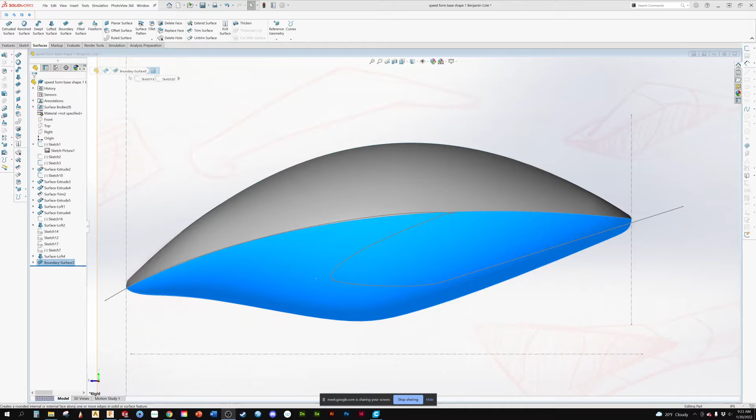So in order to trim this out using these splines, we have to make sure that, as we looked at before, if I come in and I go insert curve and I want to do a split line, that basically means I'm going to cut the surface into two pieces. I'm going to use the section. Here it is here, because it's all one sketch. Oops, we got to go to projection. It's all one sketch. And then I'll select this surface.

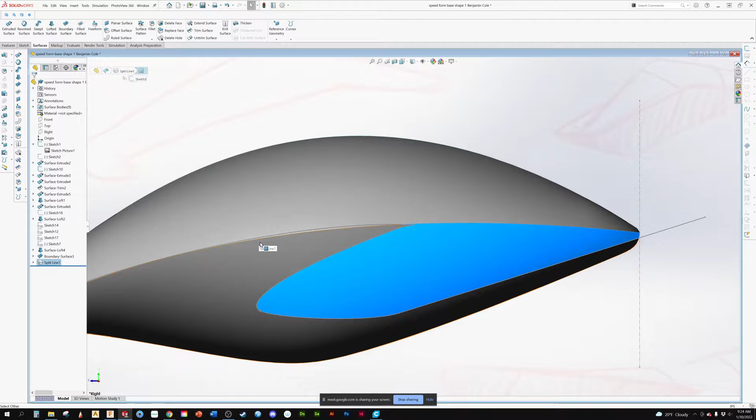Now what happens is, because we've got this extra line in there, and it comes up like this and goes around, this is the trim, the cutout that we're going to get. So what we need to do is adjust that curve so we're getting what we want. Now, what we're going to do is I'm going to come back because I want to see what your sketch looks like. So we're just going to do that.

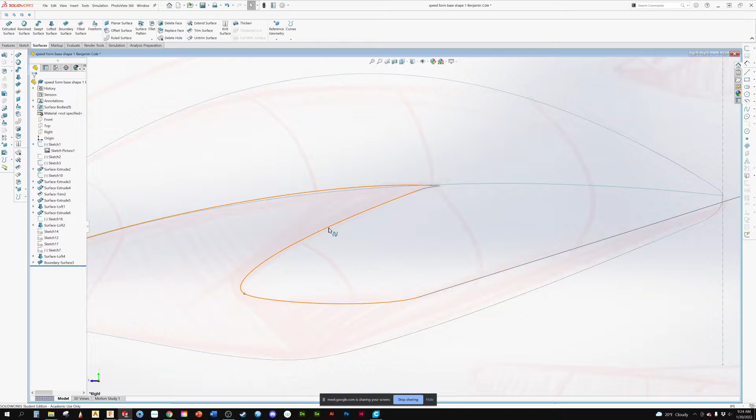And I can see that, hey, I'm not sure why you put this line in. It was an attempt to do something. But as I look at this, I want this to come up into here and blend in. So we're going to come back and we're going to edit this, and we're going to delete that. And we've got a fair number of splines here, so I would say that you would want to try to simplify this. But right off the bat, I'm going to delete this one because we just want this to go up beyond that surface. I'm also going to come in, because if I look at your mural board,

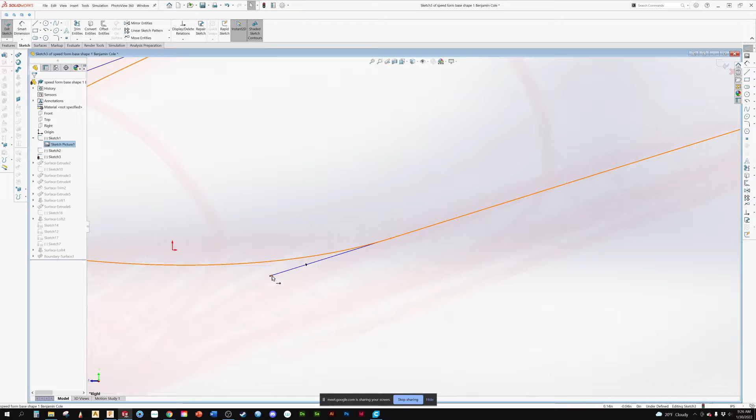this is a nice smooth line. So what I'm noticing is, well, maybe you do have it on there, but it's just ugly. Okay, so you do have a tangent. Okay, so what I would do is I'd sweeten this up a little bit. And you can see right off the bat, by doing that, it makes this a little bit smoother. Because if you have the tangency too close, you can see here, even though it's tangent, it's not a smooth transition. Oh, let me zoom back out. And you can see how it straightens out.

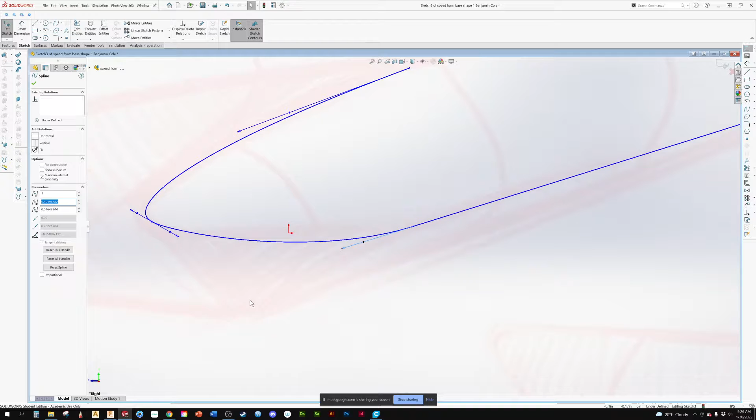So the length of the tangency is what can kind of smooth it out. It's basically saying, hey, I want you to be tangent for this distance before you start curving up into the next curve. So if I come in and I do that, I feel that's a little bit nicer looking. We won't get into this because we could say that that looks good. Part of it too is that you're coming off of straight lines, but that's fine.

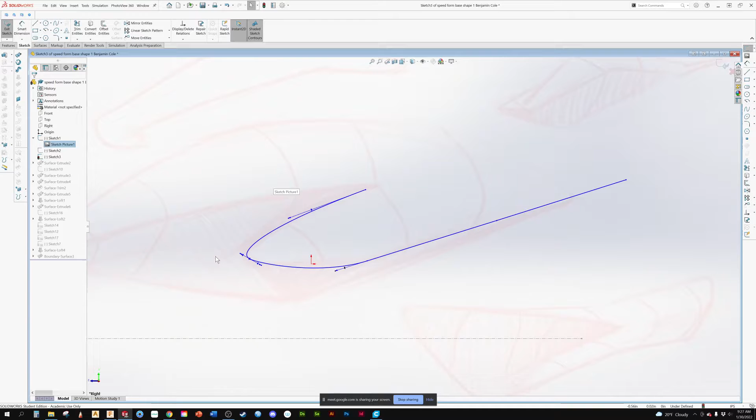Now, if we turn back on our model, oops, let me get out of the, if we turn back on our model, we can see what we want is for this line to go past this surface edge. So we'll edit this in, and for what we're going to do, I'm just going to drag it. And oh, it looks like it dives in. Okay, so here's one of the things.

Ideally, what you would do is you would have put these splines on a different sketch. Like each of them? No, just your splines. So instead of putting your splines on the first sketch that has the background image, because what that would allow me to do, right now if I want to edit this sketch, it has to go all the way back up to here, and I can't use that surface reference for anything. Does that make sense? Yes, it does.

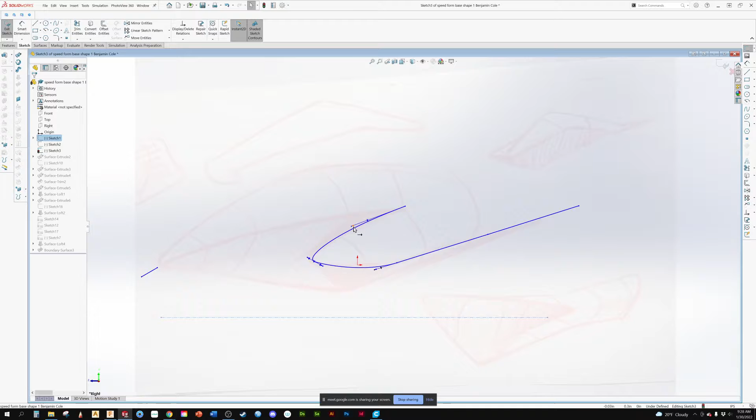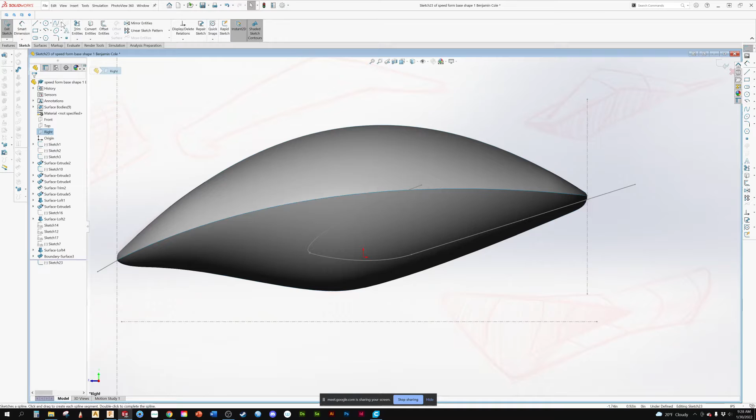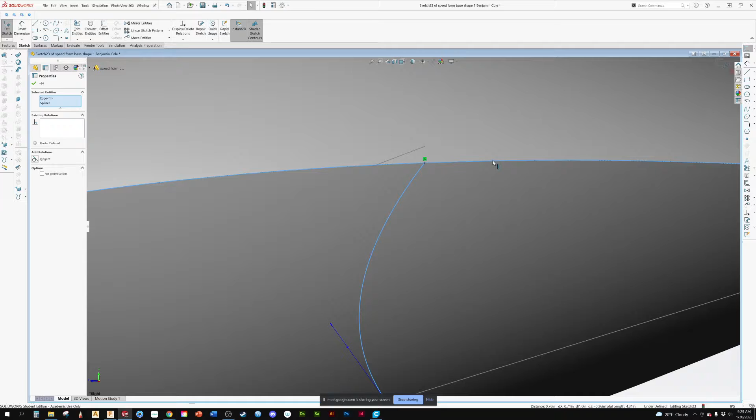Okay, so I'm going to come back because I want to use this edge. So I'm going to come back and I'm going to create a new sketch. And we'll do it on the right. And what I'm going to do is I'm going to recreate this. So you use this spline. And I don't know why it does this, but sometimes it doesn't let you make it tangent until you change it. No, okay. I'm not going to do that because it doesn't know what direction to go in.

So one of the things that we want to remember is that your sketch was a rough sketch. It may not have been perfect in relative comparison to what you wanted it to look like. That's going to be something that we're going to talk about tomorrow or on Tuesday. Because the next step of this project is going to be, are you happy with your surface form? Not does your surface form match your sketch perfectly. Are you happy with it? And then it's going to be a matter of adjusting it and changing it so that you do become happy with it.

So there I've got that. I want it to match up perfectly to this. So what I'm going to do is I'm going to project this curve onto this surface. So I'm going to convert the entities.

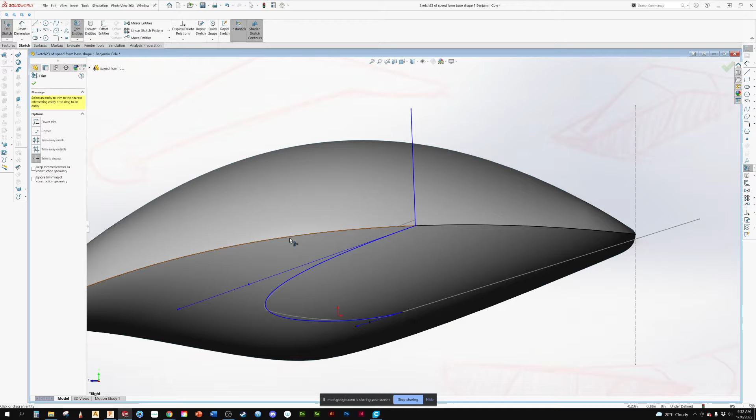And for some reason, it didn't let me trim. Okay. I'm just doing this to see if this is going to allow me to trim that line. Okay, so for some reason, it wasn't allowing me to trim it at this point. So a quick cheat is just to dump that line in. So now if I come in and I do this,

oh, come on, you dumbass.

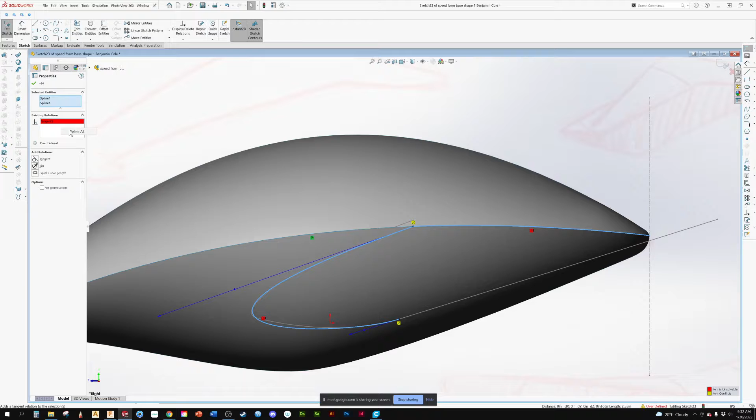Okay, so I'm wondering, no, I'm just going to go back to make sure. I'm going to hide the surface bodies. Don't know why it doesn't want to give me.

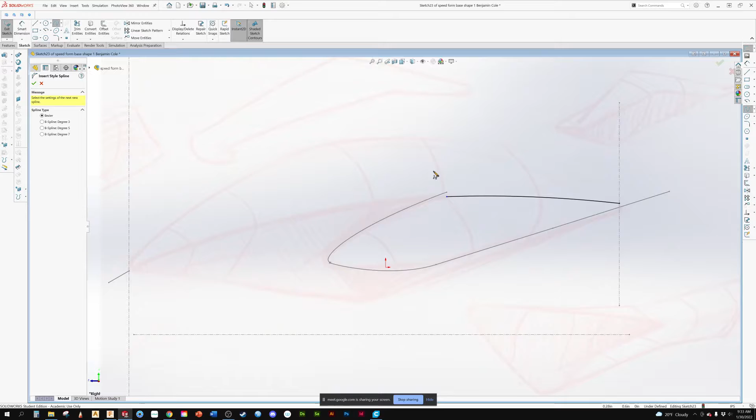So I'm going to cheat here. Sometimes there's only so much time I want to spend on something. So I come back and say, okay, you know what? I'm going to do a style spline. And what I'm going to do is, there's that. So I need one for tangency. We'll do one for adjustment, one for tangency, and then we'll snap it there.

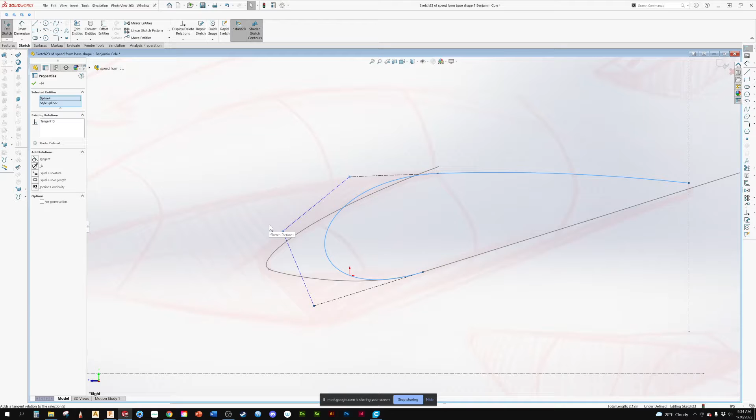So with that said, I'm going to take this and this. We're going to try to make it tangent. And then we're going to take this and this and try to make it tangent. You can see that worked. You know, so it's one of those things, again, how much time am I going to waste personally? Not much. So now, because it's tangent, I can adjust these. And this is my little one that's going to allow me to adjust the center.

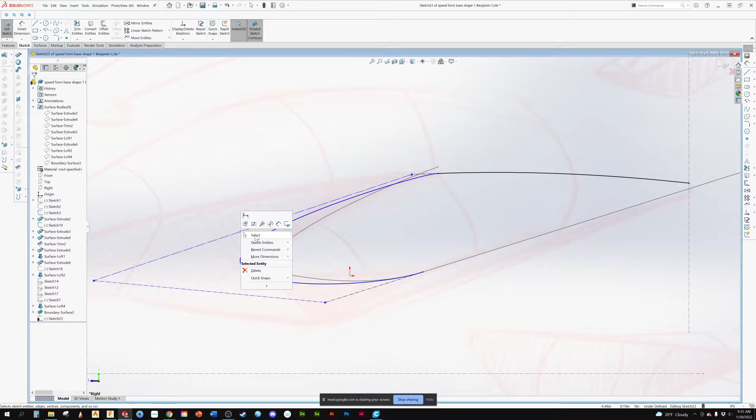And I may have wanted 2 here. And the reason I want 2 is because it's always going to be this bullnose. So what we'll do is we'll come in and we're going to insert one right there. So now I'm going to be able to get a little bit tighter stuff. So you can see again, I started off with the least amount. And you can see now I'm starting to be able to move these around to get that tighter point. Does that make sense? Yes, it does.

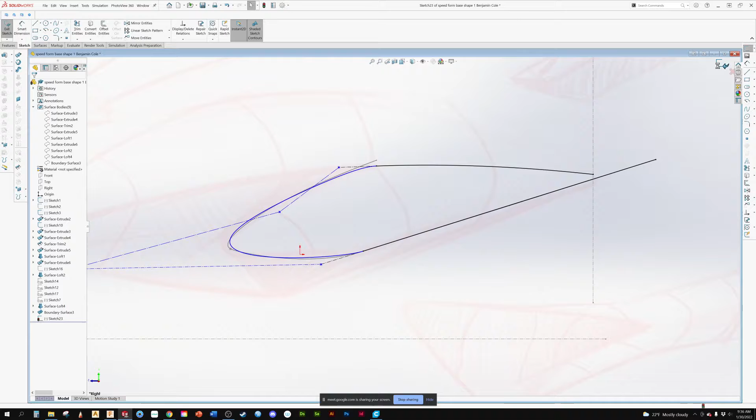Okay. So the next is, now theoretically, I should have drawn this line in this sketch and snapped it to that. But I'm not going to worry about that. I'm going to come in, and you've got this coming out like this. Okay. So now what I've got is I've got a spline up above this surface. So if I need to change this spline, I can do it here versus having to go all the way up to here and losing everything.

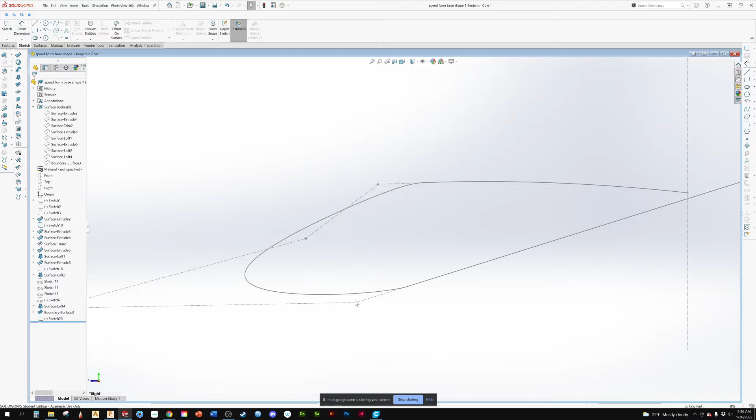Okay, so we're going to turn this off for now. Turned it off. Oh, there we go. It's sketch 23. This doesn't do what I wanted to do. Even if it matched up your curve, I don't feel that that's very nice. So what I would do is I'd probably pull this out a little bit. So it's a matter of playing, but I'm not going to play.

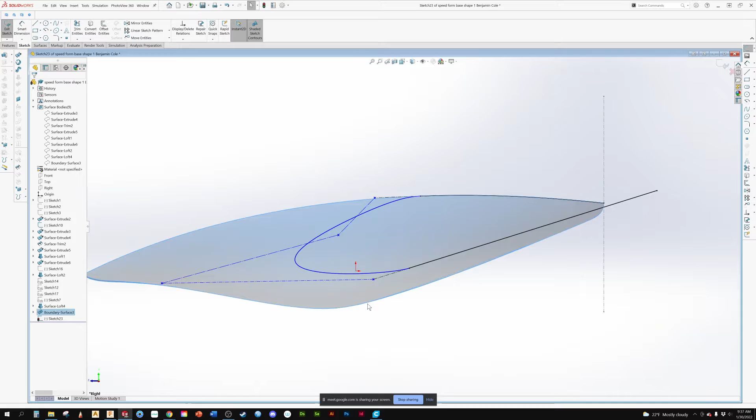So now I'm going to come back. I'll turn this back on. I'm going to unhide my surface. No, I don't need a mesh. I'm going to unhide this. And this is really the only surface I need right now. I don't need the top one. So let me simplify my screen.

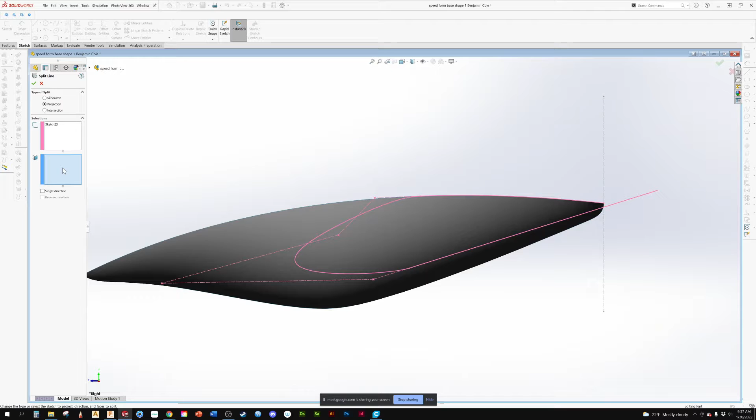What I'm going to do now is come in, insert reference geometry after I get out of the sketch. Insert reference geometry or curve, split line. Now I've got things cleaned up a little bit. So now I can project this curve or this sketch onto this surface and hit go. Now you can see that we've got a nice clean intersection here. Okay, do you see that? Yes, where it's tangent and it's like completely up to that line. Yeah, I think this is what you are looking for.

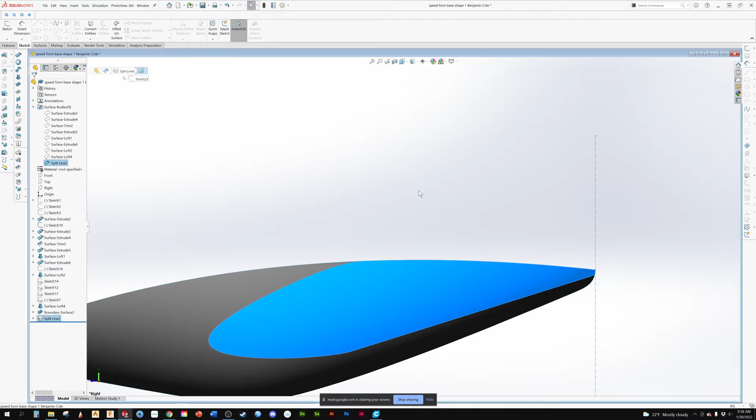So let us now come in, and we can leave that there if we want for now. We don't have to remove it. The key thing that we want is this edge on the surface, because that's what we're going to use as our guide rail. So that's going to be something that we're going to snap to.

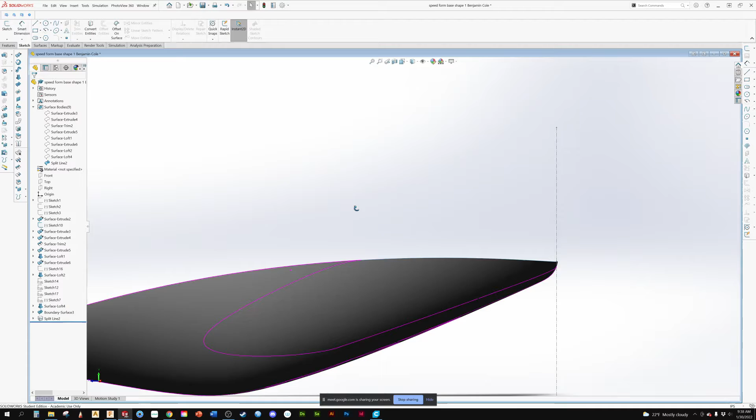Okay, so what we want to do now is, if I'm reading your sketch, this surface fades out to here and goes kind of on a straight line, like the center of it is here. So the apex or the peak of your arc is right in here. Is that fair to say?

Do you mean like a cross-section view of it? Yeah, so if I'm looking at this, those black lines that are all over it, those aren't my cross-section lines. Those are from when Nathan and I were looking at it. So if you move over to the right is where the actual contour lines are on this one.

Okay, sorry, but what I was trying to say is this angles downward. Yes. Okay, so that's going to be the plane that we want, because that's going to control that curve there, which is going to be what controls how far out this comes and how far in it tapers. Does that make sense? Yes, I just don't know how I'd make it. Okay, well, no, and that's what I'm here for.

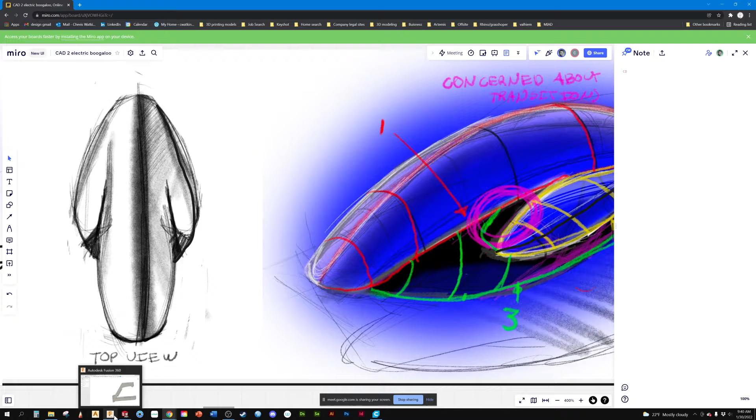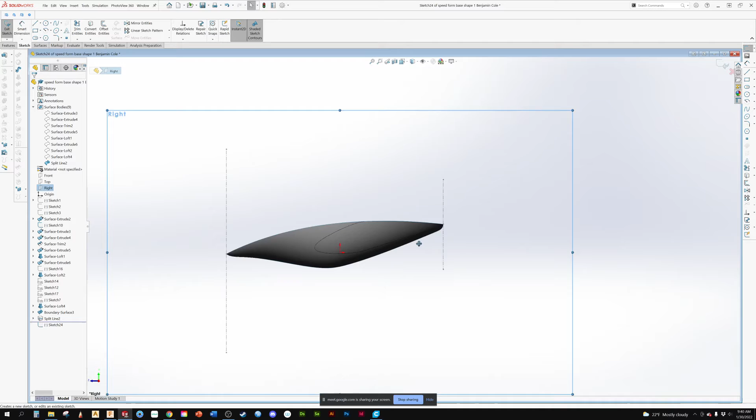So what we want to do is we're going to create a plane. So we're going to go to our right view. And we want to create a sketch plane. So what I'm going to do is I'm going to say, hey, I want this curve. And you know what, it doesn't matter where I snap to. I'm going to snap to there, going from here to here.

We're going to create a surface. And what I'm doing is I'm setting up a plane so that from the top view, I'm going to build this spline. But in order to get that spline, I need to have a planar surface. Pain in my ass because it's SolidWorks.

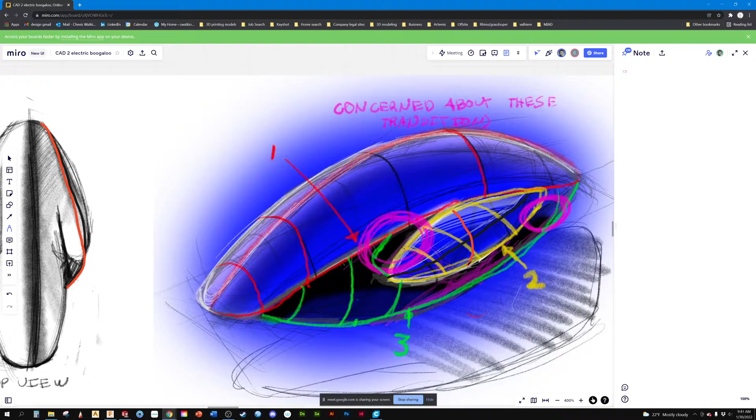Once I have this curve, I can then build these shapes, these cross sections. So I'm going to come back. We're going to extrude. And then we'll accept. I'm going to do this in 3D so you can kind of see, because if I go to a top view, it'll be different. Oh, excuse me.

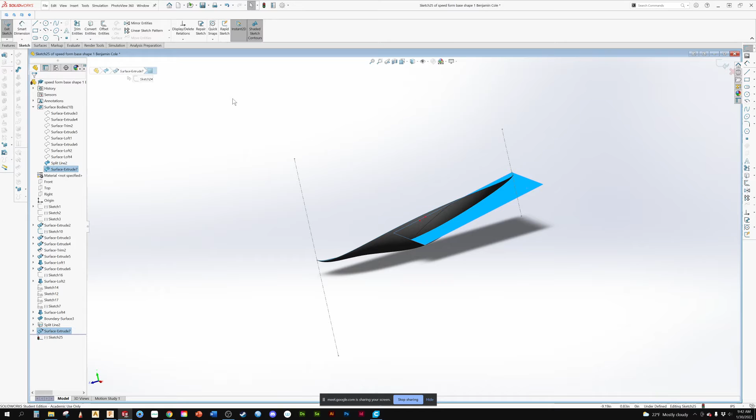So I'm going to create that as my sketch plane. So we'll sketch on there. We're going to hit accept. For me, I turn off the surface, it just makes it easier for me to see, but I know it's there. Whoa, what happened?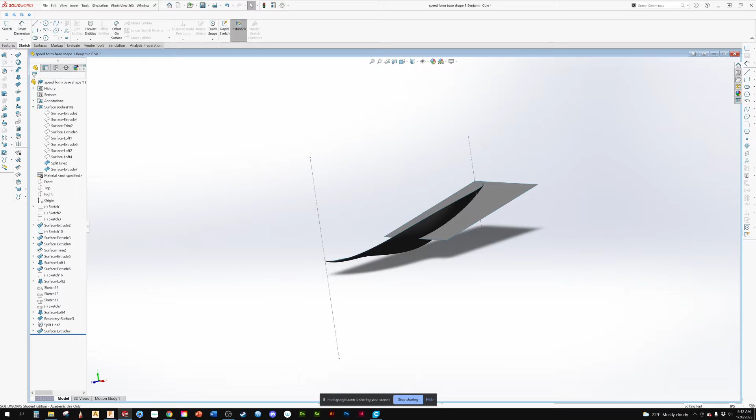Okay, so there. We're going to do sketch, select a plane or a face. Okay, then I can come up here and hide that. There we go. So what I want to do now is I'm just going to draw a quick spline, style spline. 1, 2.

Okay, so what I want to do now is I want to make sure that this snaps to that point, because that's where it's going to end. So there we got that. We're going to make it coincident. Oh, hold on. Oh, right, because I made it up to this point here.

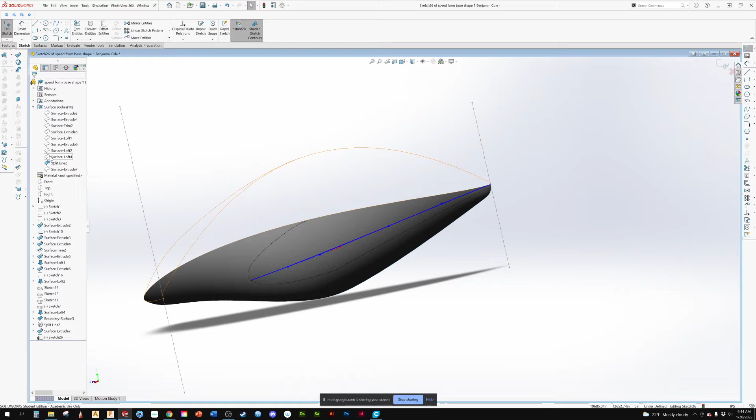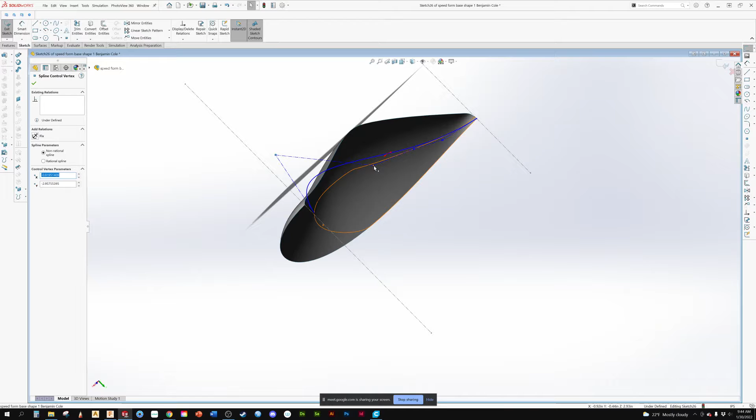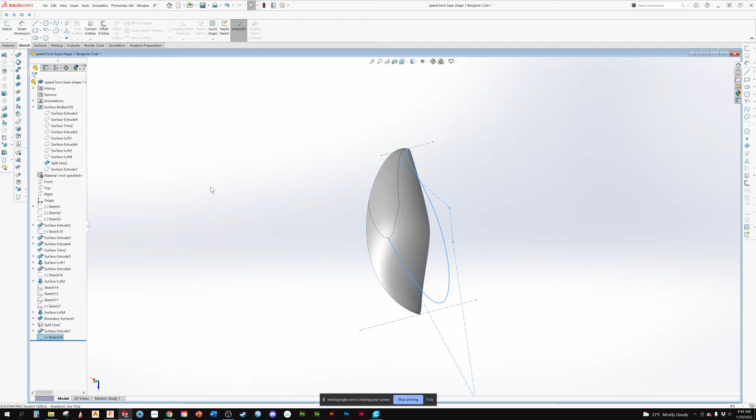Okay, so maybe I didn't get the plane perfectly right. But what I can now do is go to that view. What happened here? There we go. Okay, I think I grabbed the wrong plane because it's not. Yeah. Bear with me. Oh, I'm going the wrong direction.

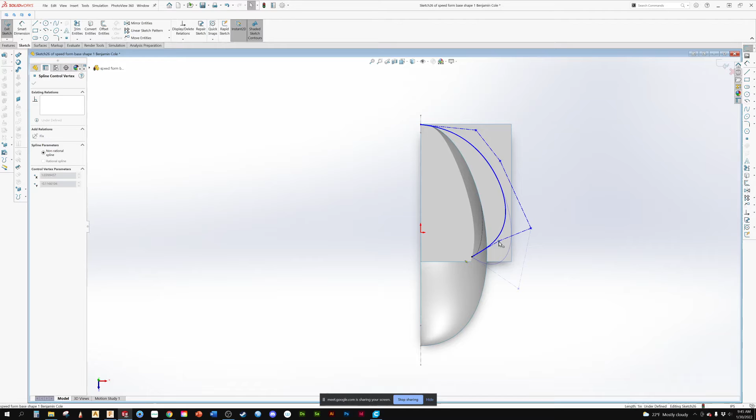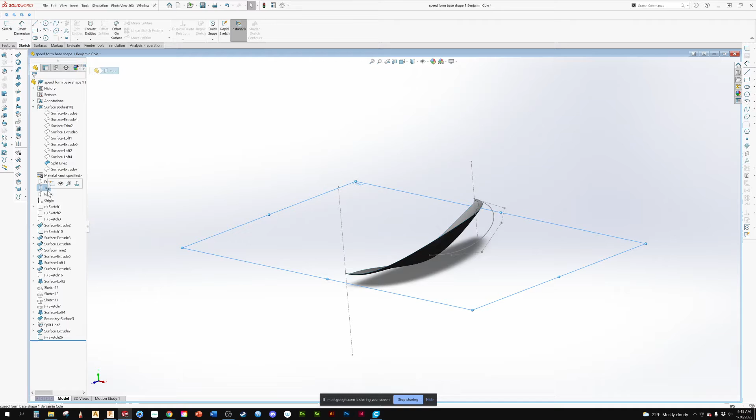So we're going to say that's how you want it. So now, if I had that surface, now I've got that boundary from a top view that comes out. So do you see what I did there? You created like a profile and an angle. Yep, and that's kind of what's going to define that center point. Now, I may not have had your center point the way you want it, but that's something you can adjust.

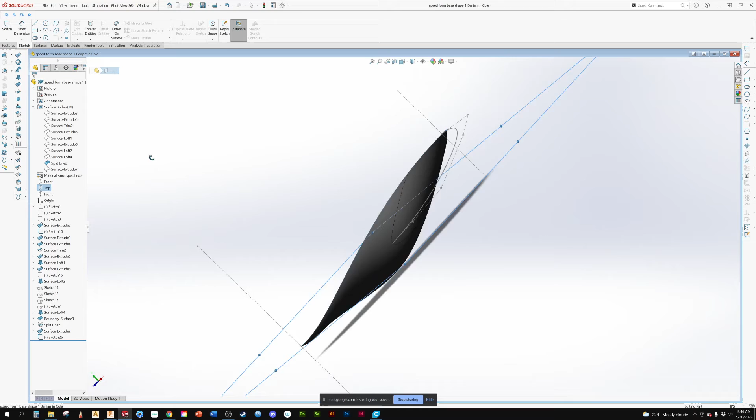And the nice thing that I like about doing this is I could come back in and all I have to do is edit that sketch and it adjusts my angle. Because I made a relationship where I said this snaps to this line, it will always do that. So that's one of the advantages.

So now it's going to be, we're going to want to build some surfaces. We're not going to, oh hold on, let me get back to there. I don't... there. And the reason I'm putting this here is as I envision your form in my head, it's going to look weird if it comes up here. I want that split line at that peak.

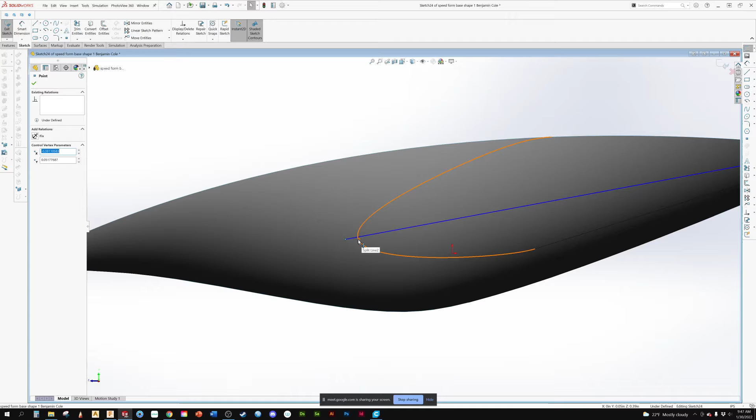So a lot of, this is why I don't have you guys designing as you go. And the reason for that is I don't think you're ready. You're so busy trying to build the surfaces. I don't think you guys are ready to be massaging the form while you go. That's why the process is: build the form, look at what you don't like, sketch it out, massage it back in. Some of that I still need to do sketching for complex parts. Some of it, you guys will eventually get to the point where if you're comfortable with SolidWorks, you can see it in your head and tweak it and refine it.

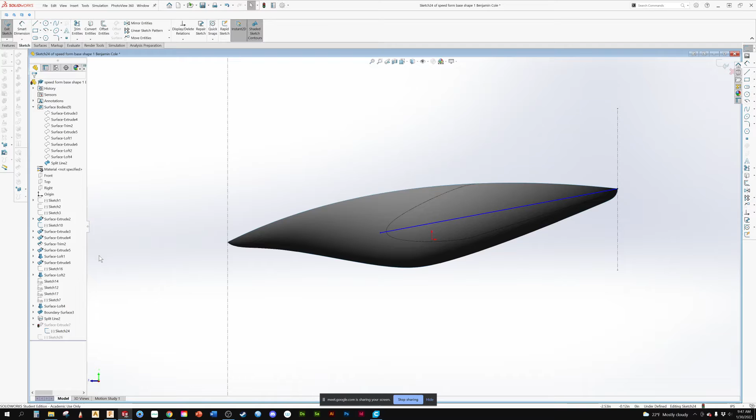So the next step is we're going to want to place the contour lines like you had.

What I would do is I know this is going to be an interesting area here for it to come into, because it all comes to a point, you know, at this junction. Points are bad, like having things come to a sharp point, is why you got that one little tweak or that one little area. Same as this point down here.

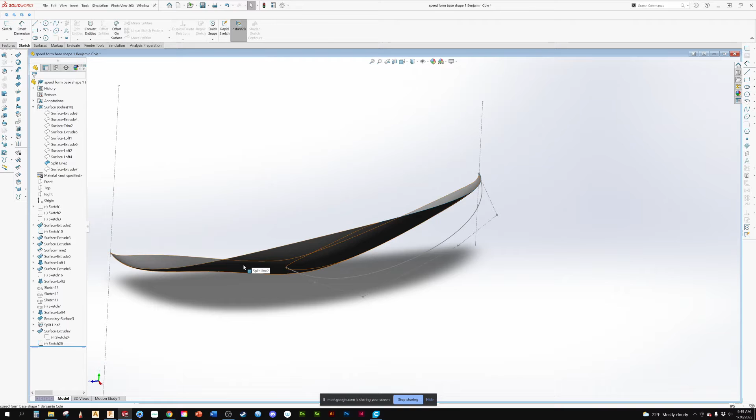So what I do is I say, okay, this is going to be a complex area. What I'm going to do is build from here to here. That's good for this surface, that's going to be my primary surface because it's going to control the overall form. Then I'll build this secondary surface in here. So you can see here's your primary, here's your secondary.

Now that I'm going to build my primary here, or once I've got this built, this one here becomes the primary, and I'm going to break it down even further. So what I'm going to do is just quickly, again, draw two.

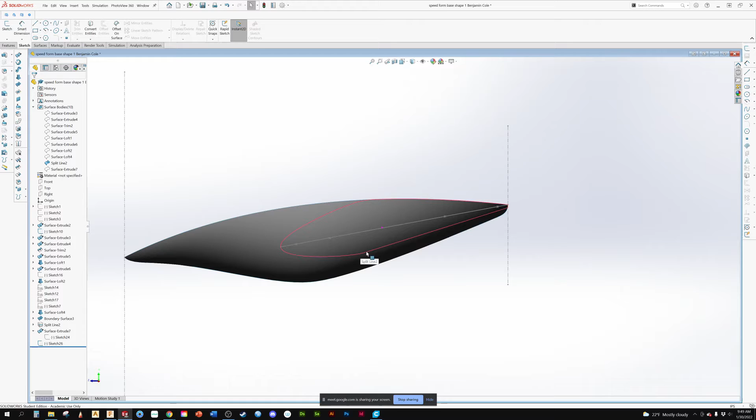I'm going to draw two sketches, and if you recall, one thing that makes your sketches better is if your surface is sweeping downward, you want your curves angled in that direction versus just doing a vertical plane. You kind of saw in the last class where I did that for Megan, and it changed the surface very considerably.

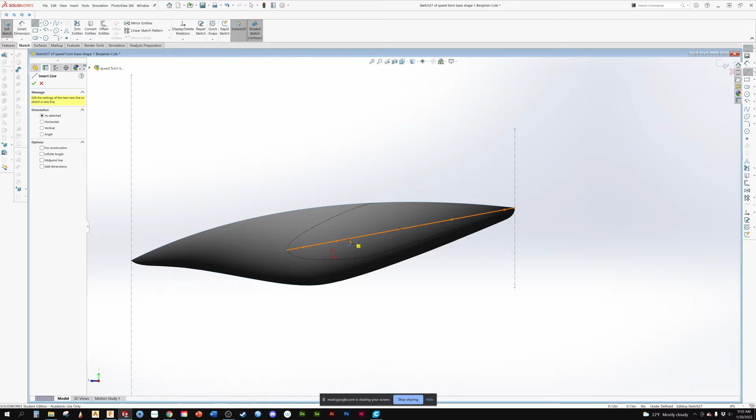So what I'm going to do is draw a line, and again, this is going to be my angle. I'm going to make it real simple, it's 90 degrees off that angle. And then I'm going to do another one.

If you don't know when you're modeling, a really quick, simple thing: when you're done a line, if you hold down your right button, you get your little window up. So all I need to do if I want to draw another line is hold the button and push to the left. These are the shortcuts - don't worry about the shortcuts.

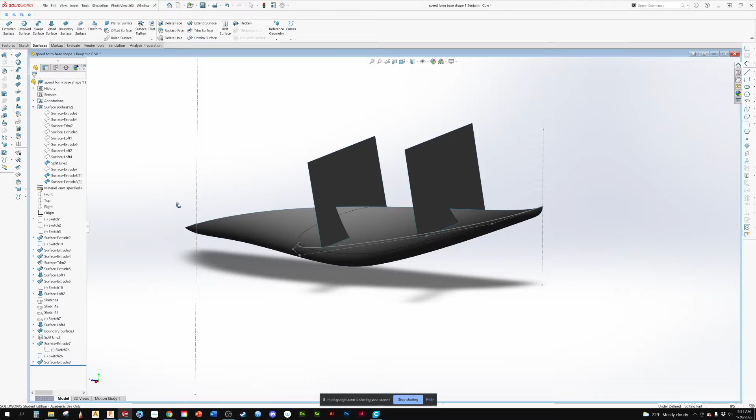Okay, so what we're going to do is build the two planes at once, and then we're going to sketch this first one. For this, I'm not going to turn that off. Now this may be too low, I don't know, we're going to see. For this, I'm just going to make it simple.

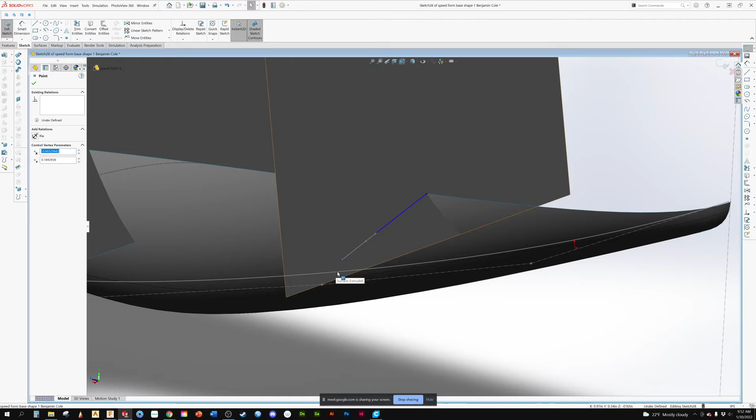And I'm going to do the normal style spline. Again, I want to select this, and I'm going to have it pierce so that it guarantees it's touching that line. So I'm going to go here, and I know that this plane intersects with this curve. So I'm going to select it, and say pierce.

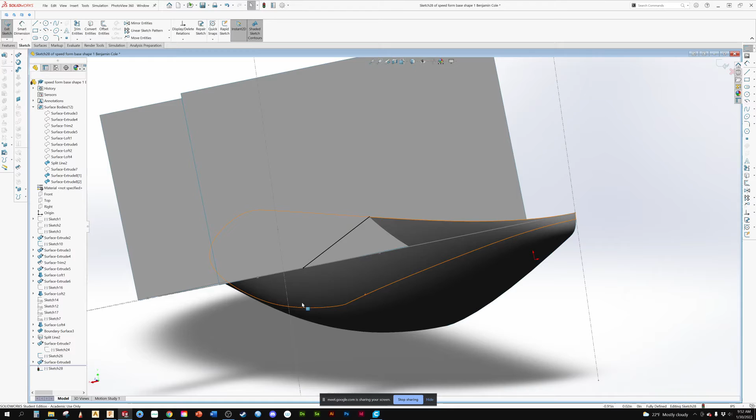Now what I'm going to do is draw a separate line because I don't want to try to make this all one line. Maybe, you know what, I could either build the top surface using two separate splines, or build the bottom surface with two separate splines, or do a full spline that's going to go from here to down here.

The difference between doing that is two surfaces are easier to edit individually than one curve is. And let's say I want to have a big radius or I want to do something, I can trim back those edges. So for now, I'm going to cheat.

What I'm going to do is build one there, and one there. So I'll take this like we did before, we're going to pierce it to that. We'll take this one here, we'll pierce it to that. And then we're going to take this one and pierce it to that.

So now you can see I'm starting to match up with your contour lines. Maybe not perfectly. And then we'll build another sketch here.

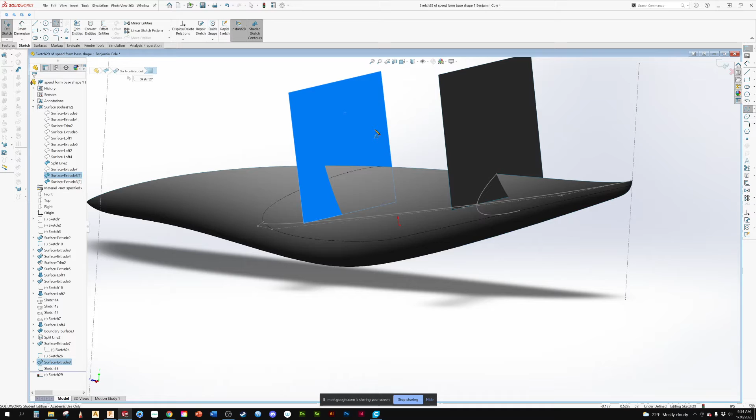And usually what you want to do - mathematically, the software knows where your sketch starts and where your sketch ends. So if my curve started up here and went down there, I want to do the same thing, I want to have the start here and the end here.

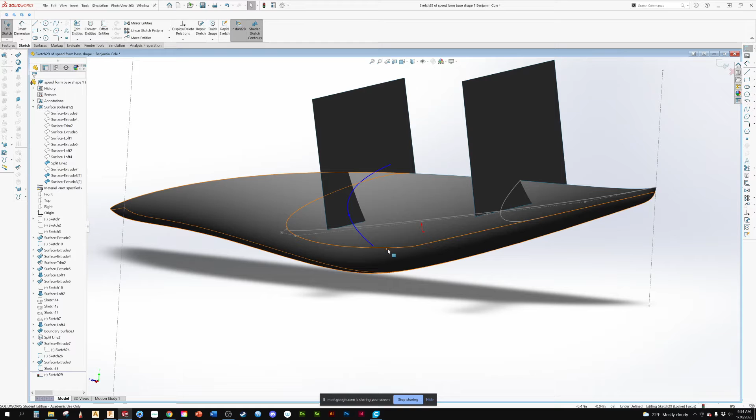It just helps the surface, SolidWorks, to figure out things easier. There's less math it has to do. So down the stream, the easier it is for SolidWorks to think, the easier it is for you to work in your model, and the less bogged down SolidWorks becomes.

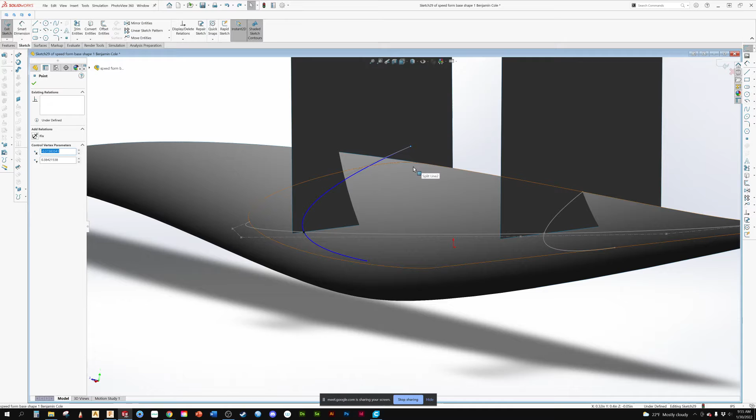So from here, we're going to do the exact same thing. Got to make sure I grab the point. Something going on weird. There we go.

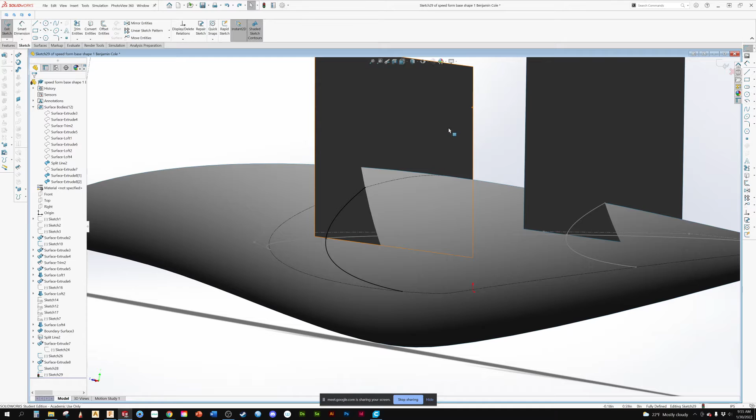Okay, so same thing now, we've got these. Now, no, I couldn't have. So now what I'm going to do, we'll hide these surfaces just to get them out of my way. Now you can see I've got, I'm starting to get my network of curves. Are you able to see the gray lines? Yes, I can see them. Okay, so you can see how we're starting to get that surface that we want based off of all these guidelines.

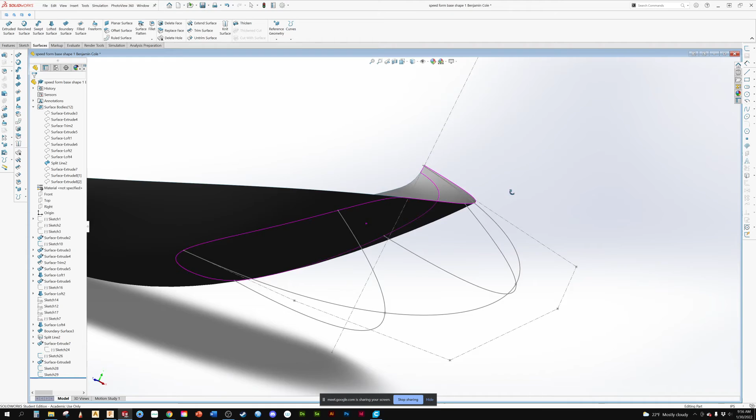So what we're going to do now is put in this secondary surface, we'll see how that goes. Because what I might have wanted to do as I look at this, I may have wanted to put a spline in here, but we'll see how it goes. So we're going to do boundary surface.

And we'll go from here. Again, you always want it to go in the direction that you want the surface to be made. We're going to go to there. Now we're going to come here.

We've got multiple lines on this split line. So the one nice thing about trying to get one perfect curve is that you don't have multiple edges. So what I'm going to do, because I've got multiple, I have to come in and do Selection Manager.

We're going to go there, and there. Let's see what the error is. I don't know what that error is. So let's try.

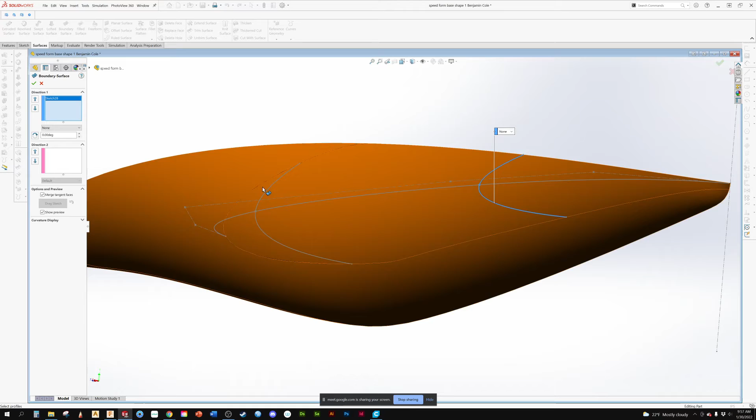I'm wondering if it's because of that. So let's edit this. I think it doesn't like coming down that edge.

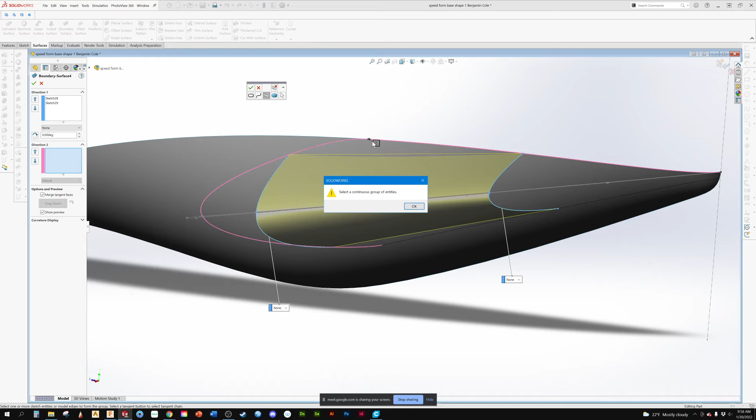Hold on, do you see where it's saying this is tangent? It wants that, you see these two little dots? Yes, just little blue dots. That's because I'm missing an edge. So it won't connect. So if I come in and we add that, it still doesn't like it.

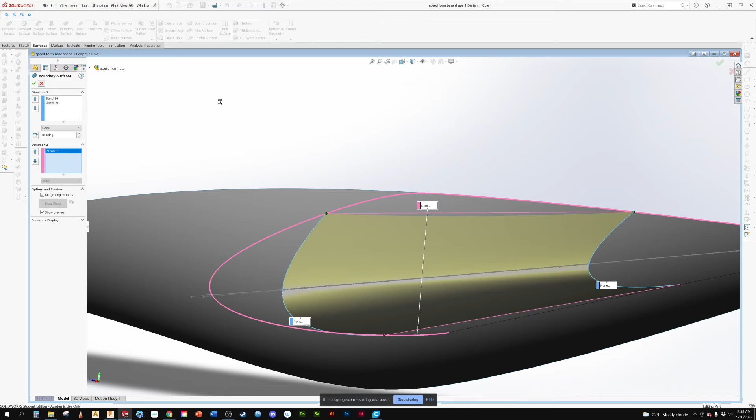So what I'm going to do is I'm going to say screw you. I'm going to come back up and say, you know what, I want a filled surface. Oops. And I think because we have this weird intersection, that's what it's not liking.

So let's do a boundary or a filled surface. We've got this edge, we've got this edge, we've got this edge.

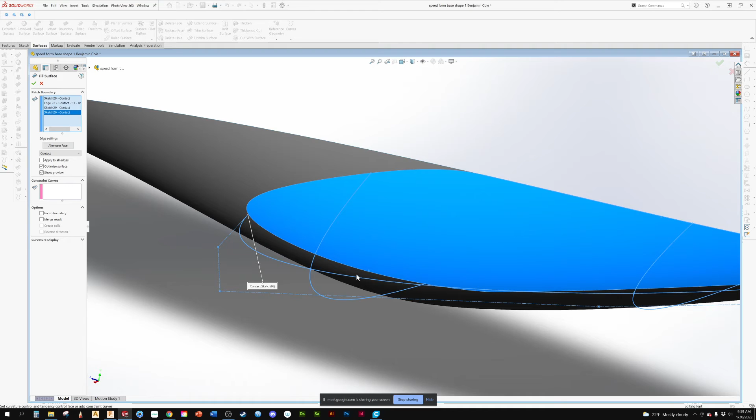I don't think it's going to like this either. The boundary is open, okay. So I got a feeling this is where it gets hard, because I can't see my edge anymore. There it is.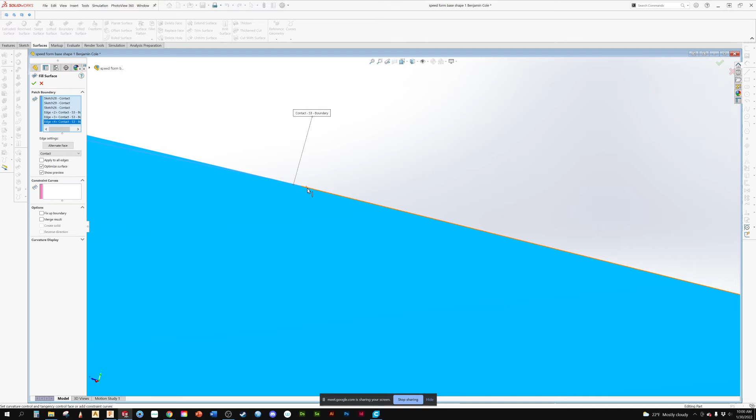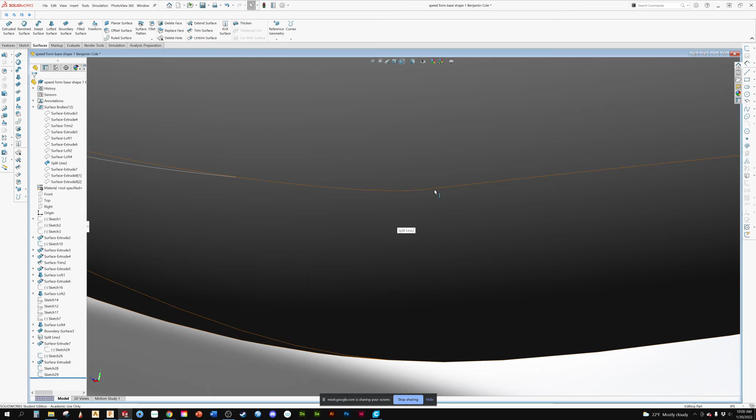Okay, so I think I know what's going on. Where before I wasn't getting that small little piece, I've got a feeling... no.

Okay, so what are we going to do here? What are we going to do? So I'm going to break this down even more. I'm going to come back and add in another profile.

So I've got that. And then what I also want to try to do, what I would like to do, is to get rid of this little edge here. So with that said, I'm going to come back to my split line.

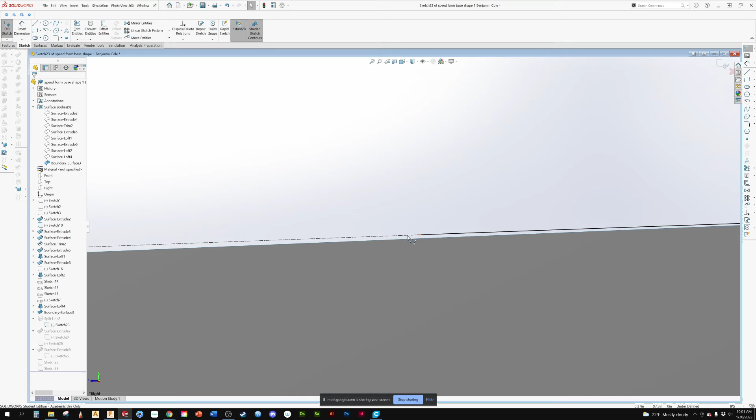I'm going to edit my split line. And this is one of those things where what I'm going to do is I'm going to have this, I'm not going to worry about this fillet. I'll do that as a secondary thing later.

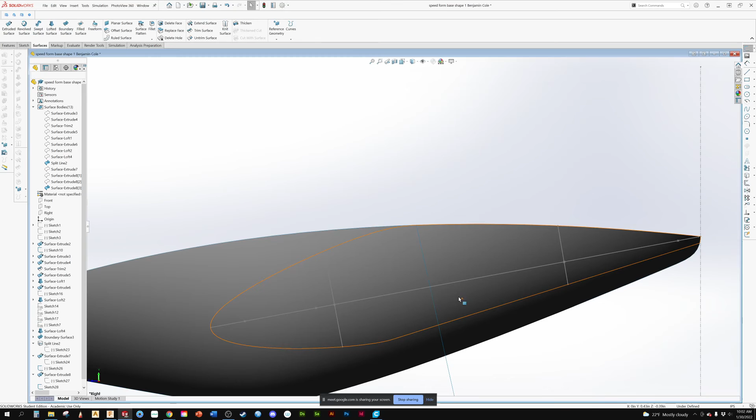So what I've got now is I've got a clean edge. So, oh no, what the hell? Okay, so I'm going to adjust this split line again. And instead of trying to make a tangent here... come on.

I'm just going to have it come out. Let's see if that gets rid of it for me. Because the whole thing is I can go back in and patch that surface in. So there we've got that. Okay, let's see if that does what we want.

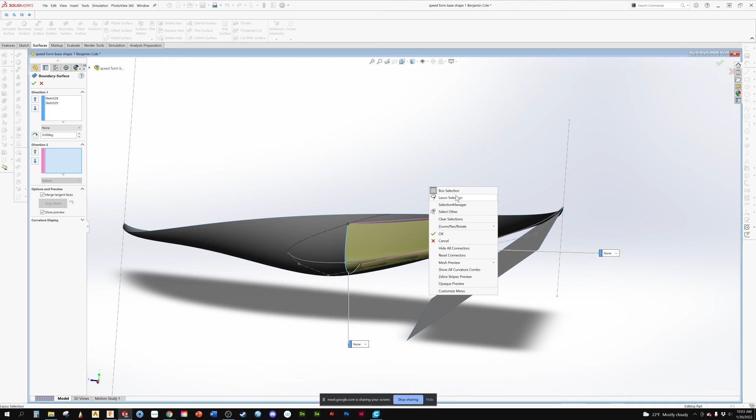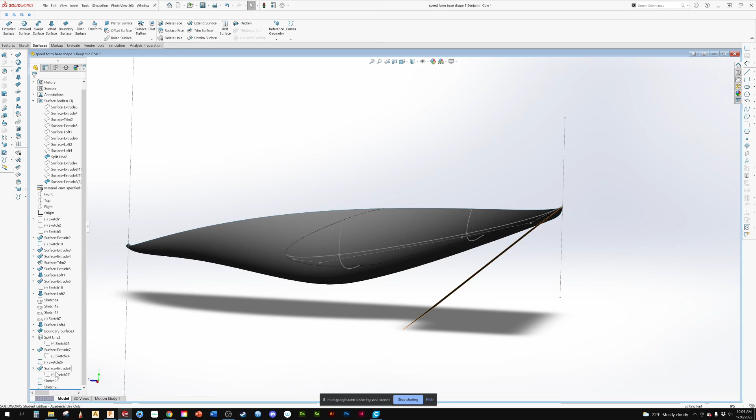No. Oh, come on. Okay, so I think what I need to do... so I think the problem is because this isn't tangent, it doesn't like it. So we may end up with a crease.

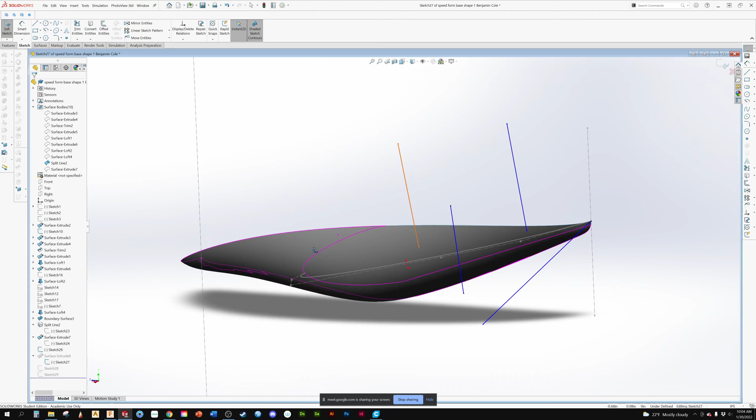But again, even with me, I rough these surfaces in. Now ideally, I want these all to be parallel.

You know what I'm doing here, so I'm just going to go faster. Travis, I think I understand what I'm supposed to do now. I have to go pretty quick here. Yeah, okay.

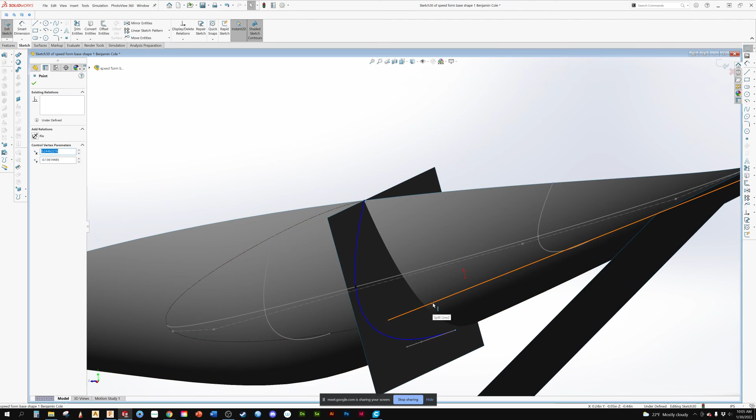So again, I was trying to do it all in one happy surface. You can hop off at any time. I'm just doing one of those things where it's like, damn it, give it to me the way I want it.

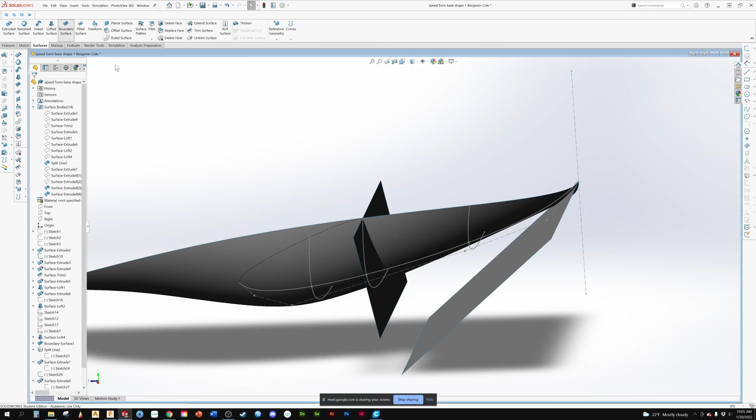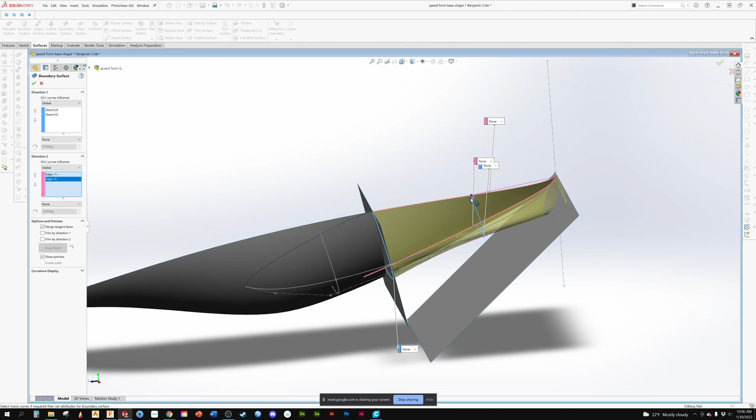There we go. So that was the problem, is that it was trying to get... it didn't like that. So again, you just have to keep fleshing that out.

And kind of like I said, so now you can kind of see that we're starting to get there. Does that help? Yes, it does. It helps a lot. I think I know what I'm going to be doing for a while today.

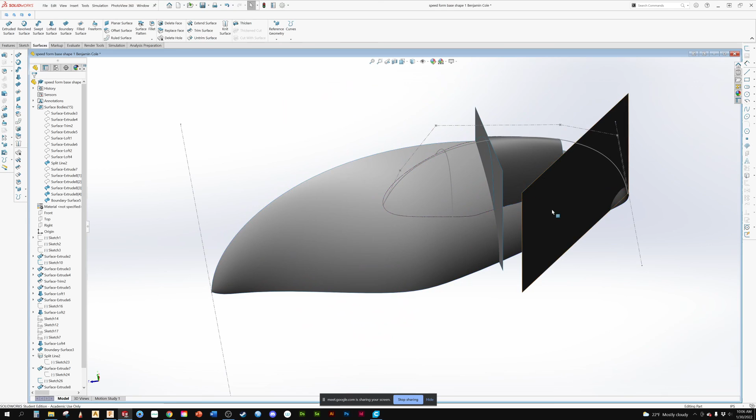Okay, so the key thing too is, part of the hiccup, and you worry about this later because we're roughing it in, is this spline. This spline is causing us the problem. How it intersects is what's causing us the problem to get these surfaces to go perfectly. But that's fine because you roughed the form in.